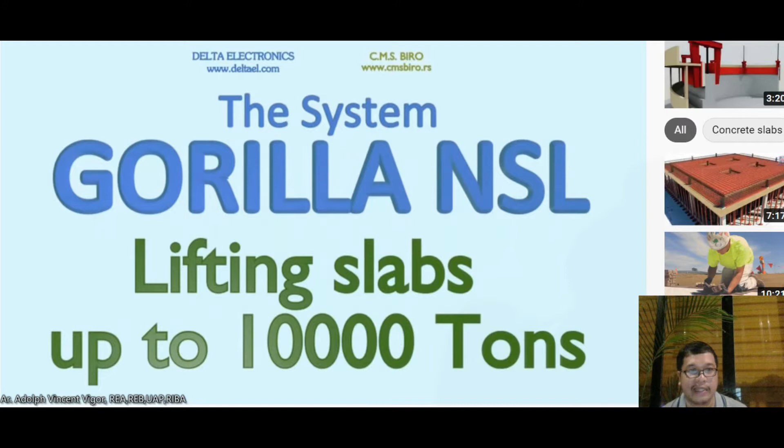So you can lift slabs up to 10,000 tons using this method. As you can see here, class, look at the columns. You can see there are holes in it.

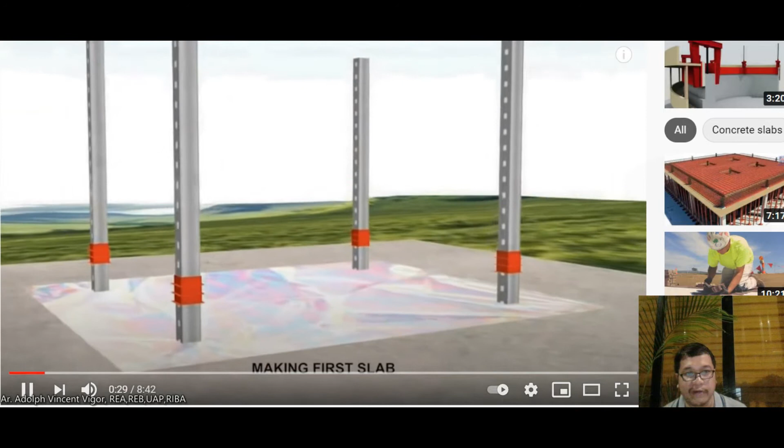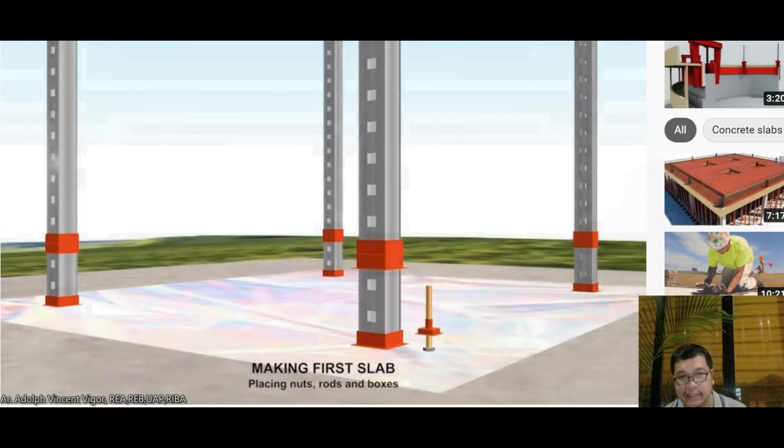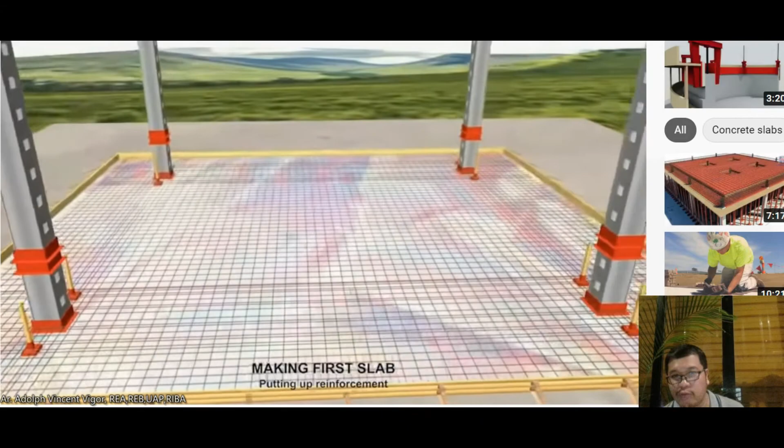First you're going to place a film here, secure it. Then you're going to place nuts, rods, and boxes. Then you're going to place the formwork. You're going to use the formwork to secure the wood, and you're going to place some reinforcements.

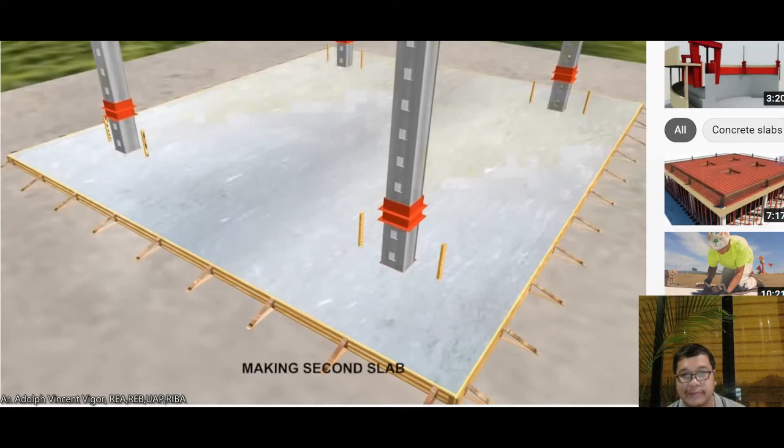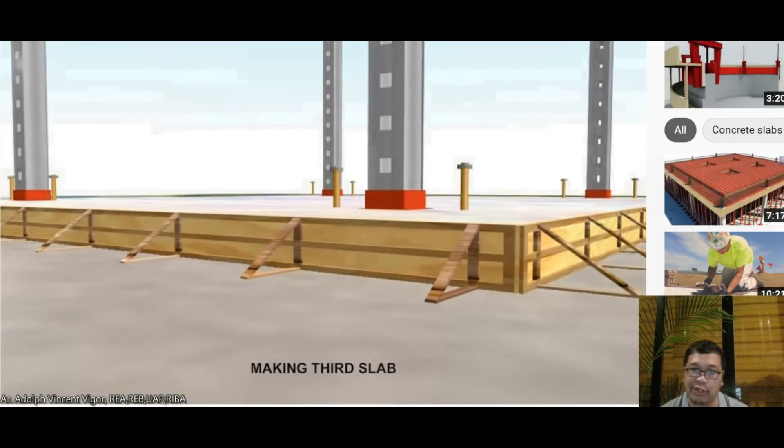Of course, repeat the same process. You place the reinforcements, then you're going to pour concrete again. Let's go to the third slab. Of course, you're going to place a film to separate it from the second slab, and then secure it again.

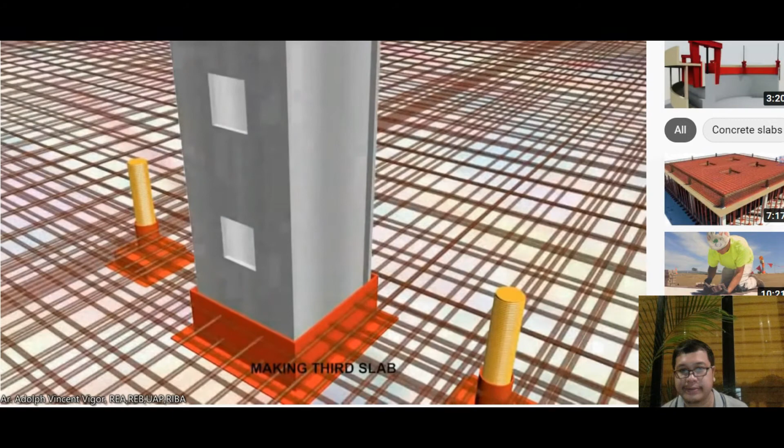Okay, then we're going to add reinforcements. You can see you have 3 layers of slabs here. They're separated with a film finish.

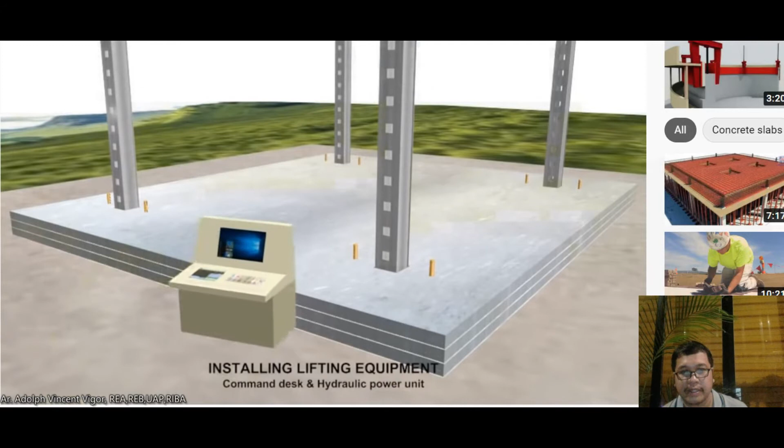Then we're going to install the lifting equipment. This is the computer, class, which will determine the lifting process and control the entire lifting process.

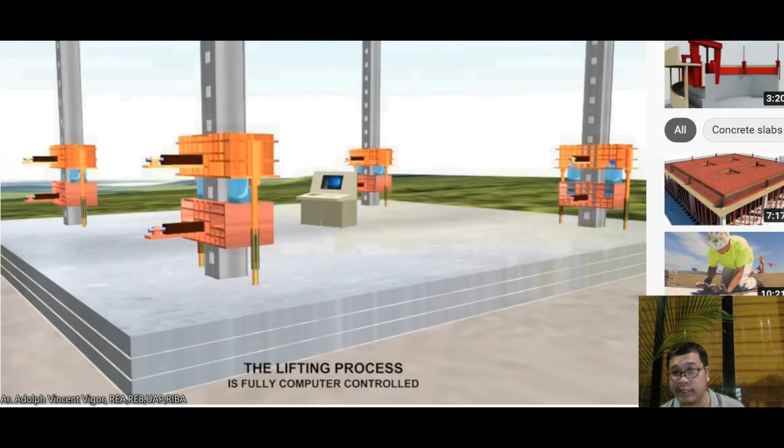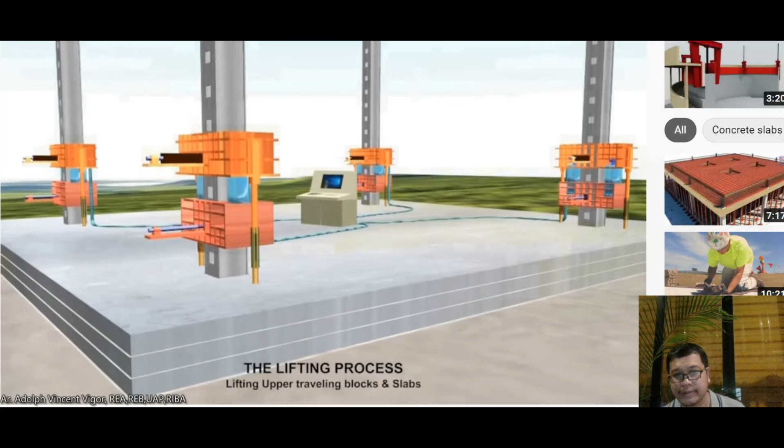Since it's already locked, we're going to lift the slab one by one. You can see this is a film; it's still left on the ground.

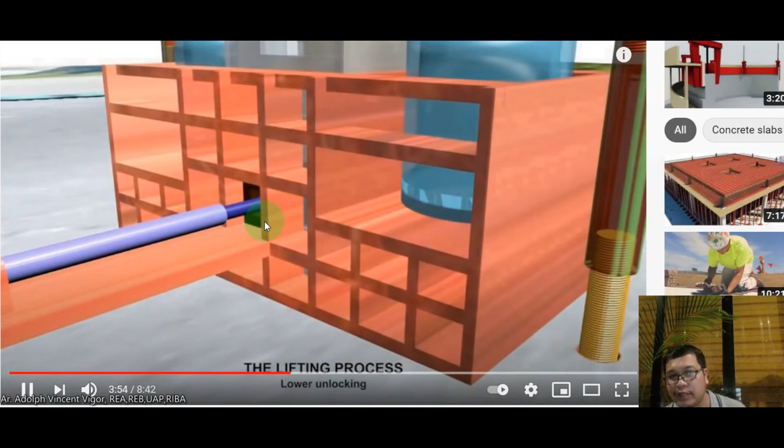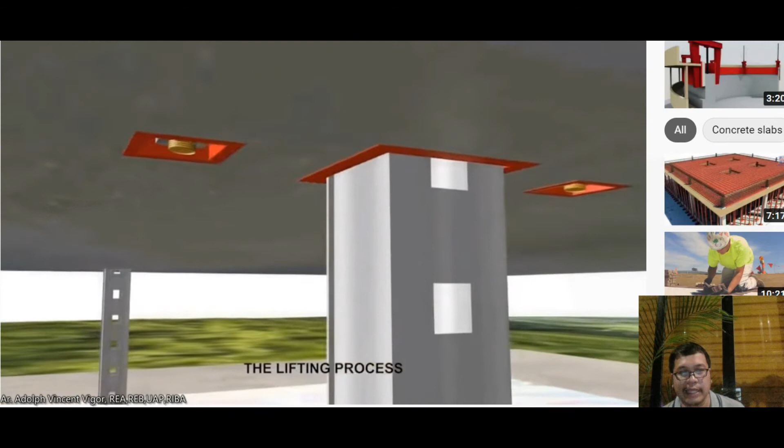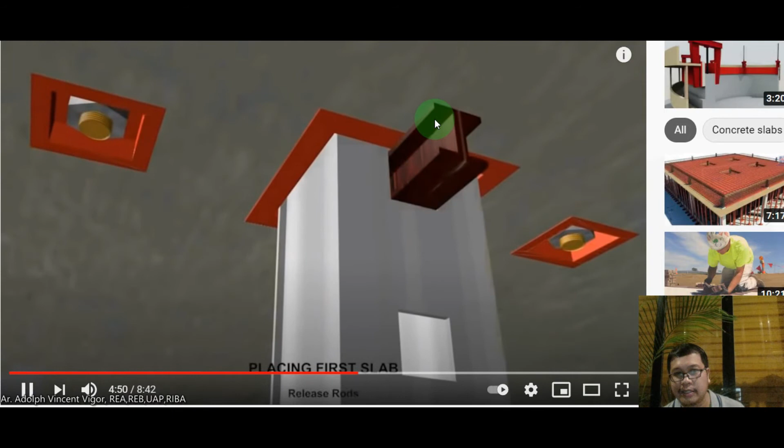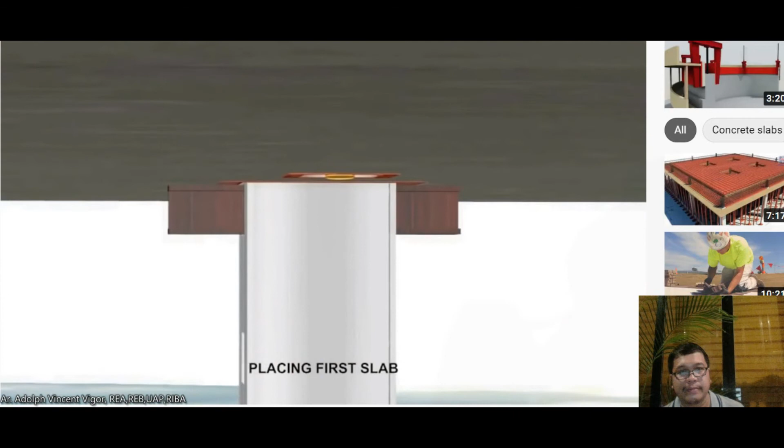So everything, class, is controlled by the computer. Nothing will activate without it. So let's place your slab. We're going to insert the support here; this will support the first slab. Then we're going to remove the nuts. So let's make sure that all sides are already clear.

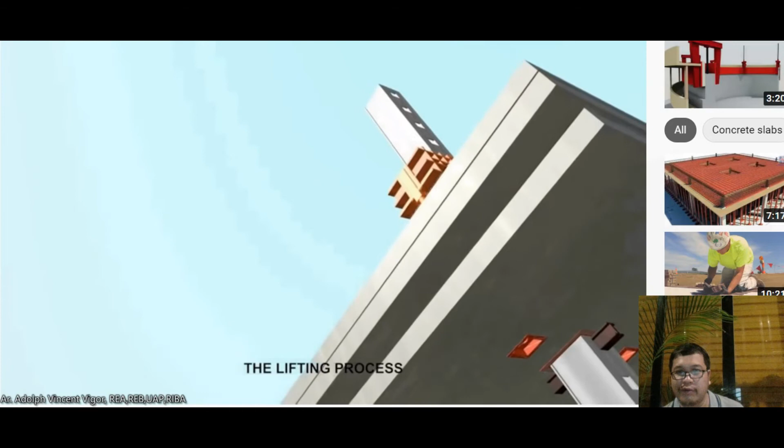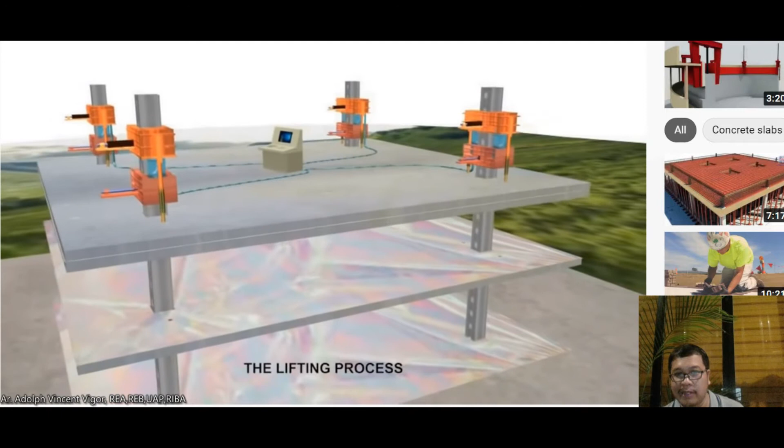So when you go up, the bolts are already removed. We keep barely one of the slabs below, then you're going to lift the two other slabs again. You need to repeat the same process until you reach the desired floor, then we're going to remove the other slab. This is fairly accurate since it's being controlled by the computer.

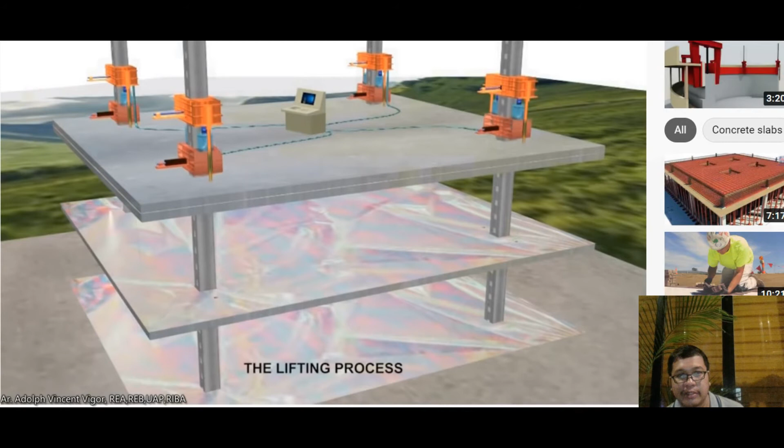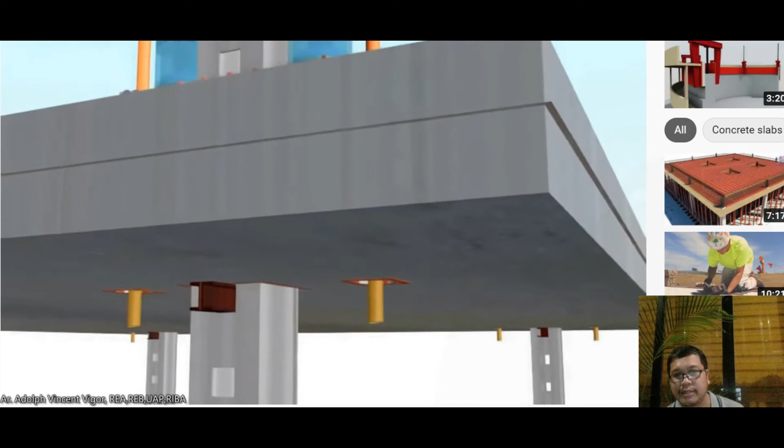So we're going up again through the hydraulic process. This is the film, class, which separates the different layers of the slabs, since you're going higher.

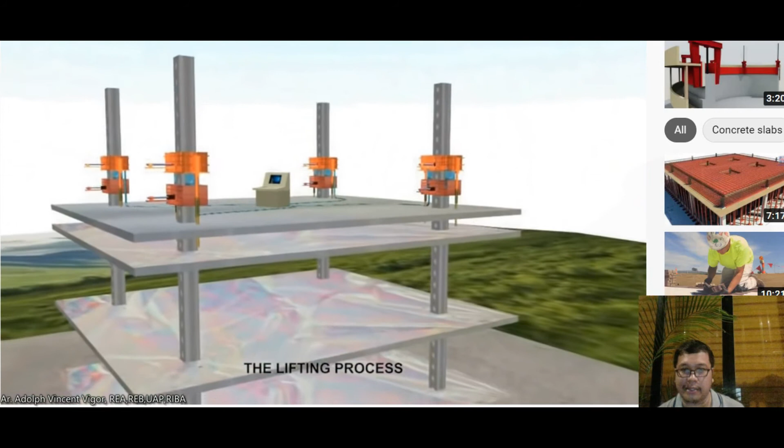I think this really makes it a very convenient way of constructing your buildings. You'll have to repeat the same process until you reach your desired number of floors. So you can go really high using this technology. Okay, so these are the examples.

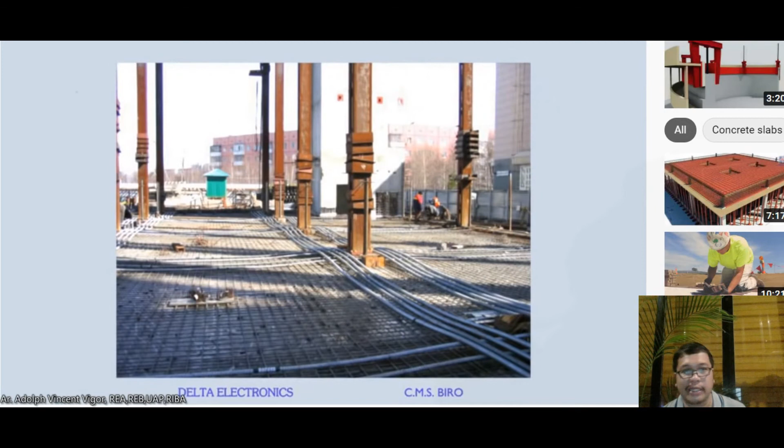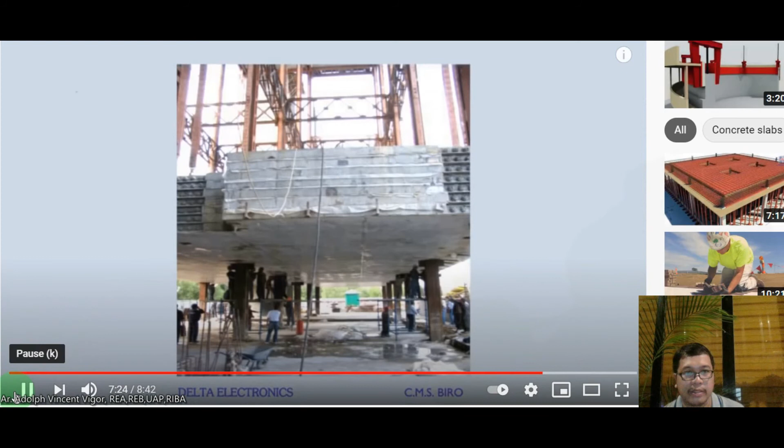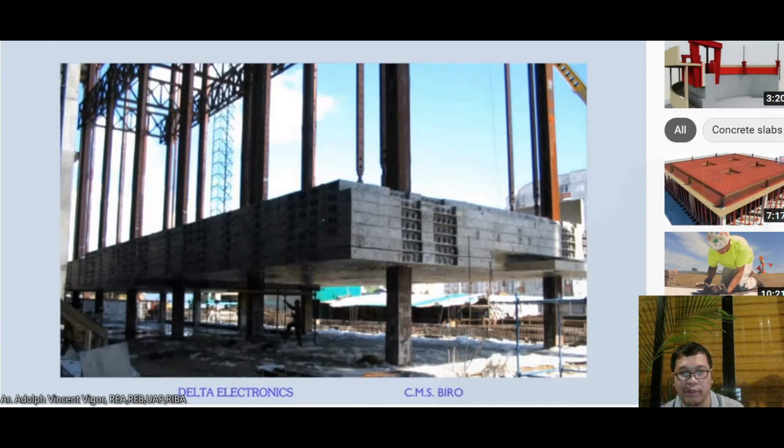So someday, class, when you'll be working in big firms outside Cagayan de Oro City, you're going to experience doing the lift slab system, especially if you plan on working overseas.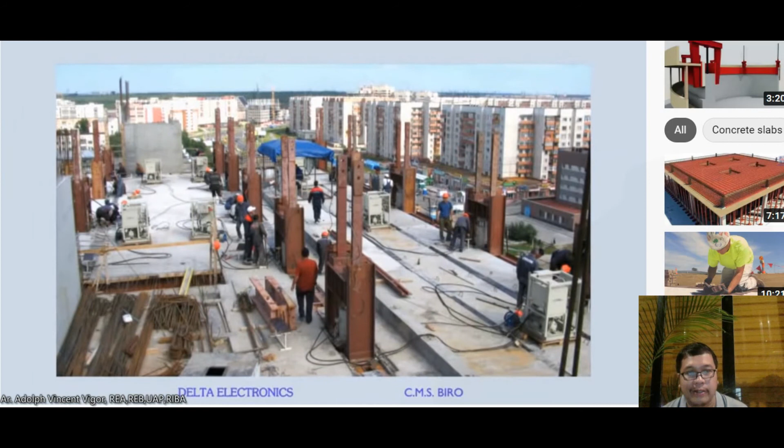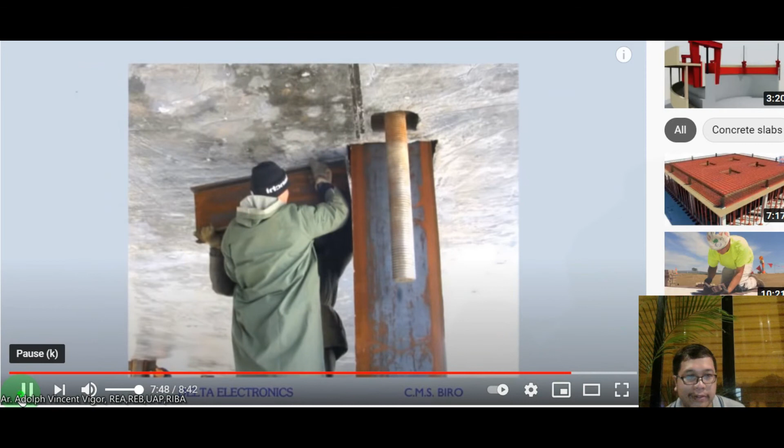Let's go back to this. Okay, so it's really big. You can just imagine the weight of one of these slabs. So the challenge here, class, is to really follow your schedule, and then you really have to be familiar with the technology when you use this kind of system.

So when you graduate, class, or become architects in the future, I encourage you to try to work in some of the bigger firms in Manila or outside the Philippines so that you can see these systems.

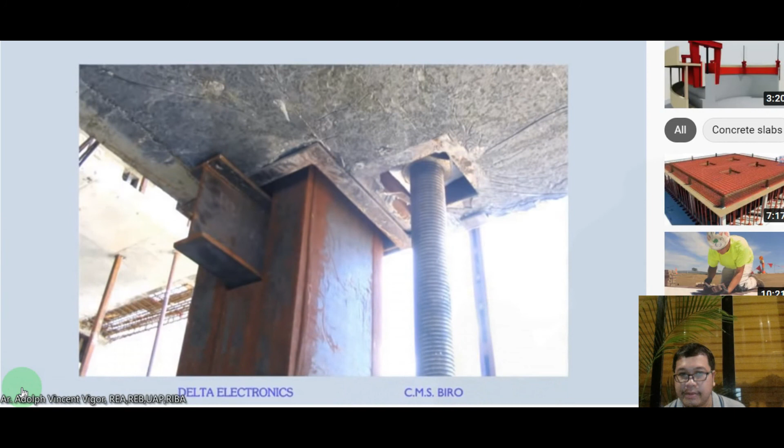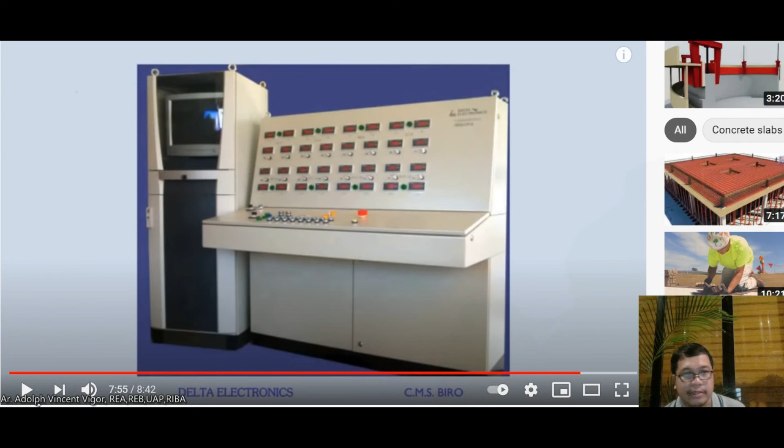So these are the actual pictures. This is a picture of the computing unit which will be controlling the hydraulic system.

So I think when you become a site architect someday, you'll experience moving up and down the tower crane, especially when you're going to take pictures and do your reports, because when you're a neophyte site architect, they will be assigned by the office to take pictures. You can just imagine how high this is. In my experience, when I was working in Jeddah, it was really scary because I had to go up the tower crane and take pictures of the building as part of the reporting for the progress of the building.

Okay, so this will be our lecture for this week, which is about the lift slab construction. I hope that you'll put this into your heart.